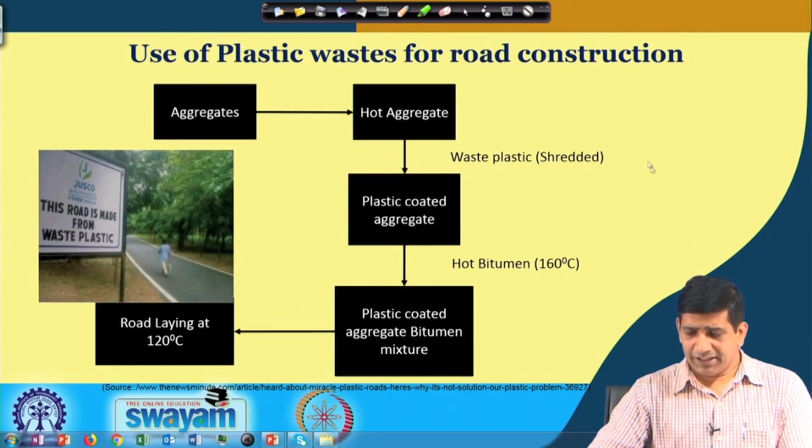So as you see, in Jamshedpur, in Tata Nagar, this road is made of waste plastic. So it's being used in many places in India and also abroad. The only thing you are doing different here is you are adding waste plastic in this step, and that helps in some of the properties which we will see as we make progress in this lecture. So that's where the waste plastic comes in, and then we will look at the whole process of how waste plastic use in roads is done.

So let's look at this, and then we'll discuss in more detail the use of waste plastic in road construction. And this video has an audio component. So again, I'll put myself on mute as long as this video is playing, so you listen to this video, and then we'll discuss some issues associated with that.

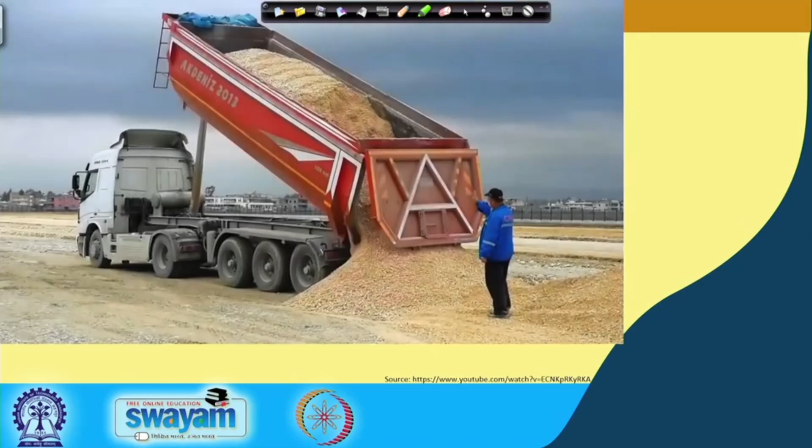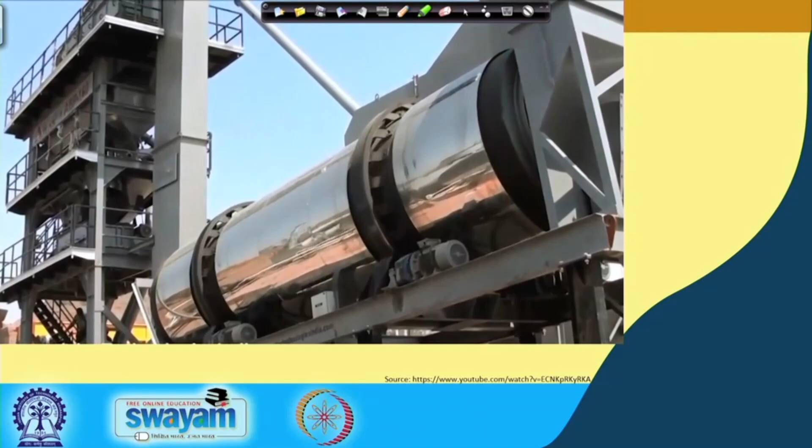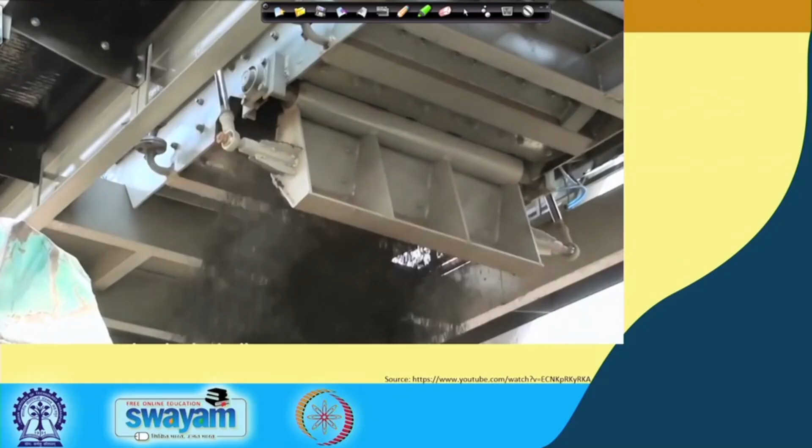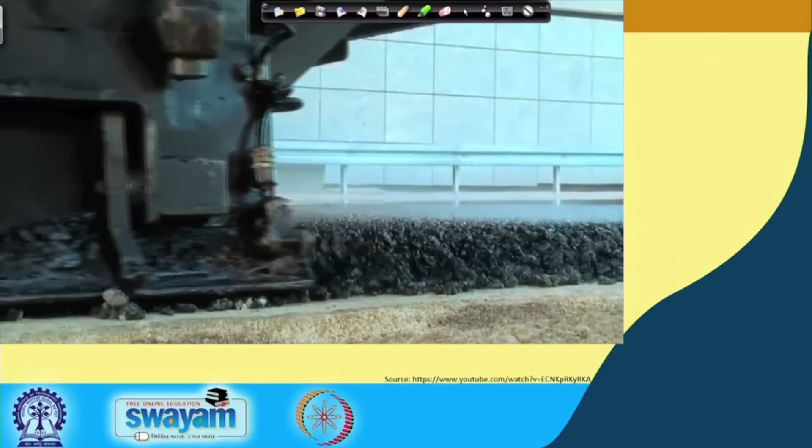Plastic roads, the laying procedure. The laying procedure for the plastic roads will be the same from the subgrade course to the base course, like any flexible pavement. The waste plastic is accumulated and is sent into the shredder machine. The shredded plastic will measure between 10 to 15 millimeters. Fixed proportions of shredded plastic are added to the aggregate on a conveyor belt in a hot mix plant. It is then sent to the mixer, where the shredded plastic melts and forms a layer on the aggregate. This process happens at temperatures between 170 to 180 degrees centigrade. The plastic coated aggregate is then subjected to bitumen. Plastic, being a good binding material, holds the bitumen together. The final BT mix is collected and loaded into the paver. In the final step, the plastic coated bituminous mix is laid according to the alignment and is compacted as per the standards. Plastic roads, a perfect solution. We are spending 4.5 trillion rupees on annual maintenance of roads and similar infrastructure. They are cost effective with nil maintenance.

As you saw, the whole process in which the plastic waste was laid was essentially similar to what we do for our road construction. But again we are adding this plastic, as explained in the previous slide. First the plastic is shredded and then it is mixed with the aggregate, and then we add bitumen to it.

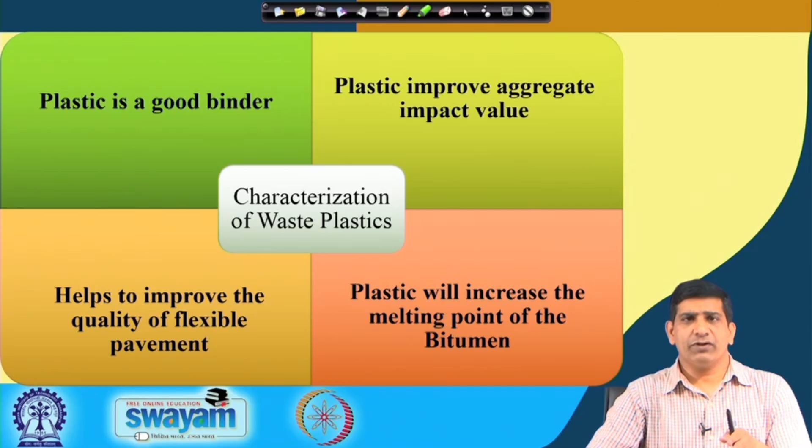So that's why it works, because plastic is a good binder. It helps in binding those aggregates together. It improves the aggregate impact value. It increases the melting point of bitumen, so it helps to improve the quality of flexible pavement. So these are some of the salient features of why plastic waste roads are considered better than traditional roads, and they have been found to be better as well, as documented so far. So these are some of the reasons why.

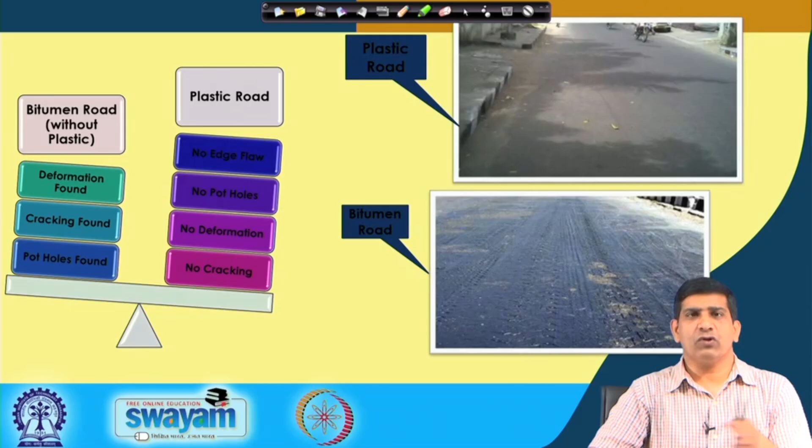And from a plastic waste management point of view, you also see that it's a plastic waste management solution as well, and at the same time it's a transportation solution, because this road is coming out to be better. But whenever we come up with any process, any product, anything, there will always be some issues and challenges, there are always some limitations. So, similarly here we have to clean the plastic,

because if you have too much dirt and other stuff, you have to clean it. You can have some toxic stuff present there. Toxic presence in commingled plastic waste would start leaching. So after cleaning, the wastewater that you have needs to be treated. So that's an issue. During the road laying process, there is presence of noxious HCl gas, because the plastic has some chlorinated product. When you have chlorinated product, you will have HCl gas being formed, and that becomes a problem.

And when you have pure plastic roads, it requires use of compatible plastics, because when you use mixed plastic, they may have phase separation, because there are different types of plastic. And if you have phase separation, then you will have a structural weakness, which can lead to premature failure. So you need to have similar types of plastics, compatible plastics that need to be used. So you have to make sure of that.

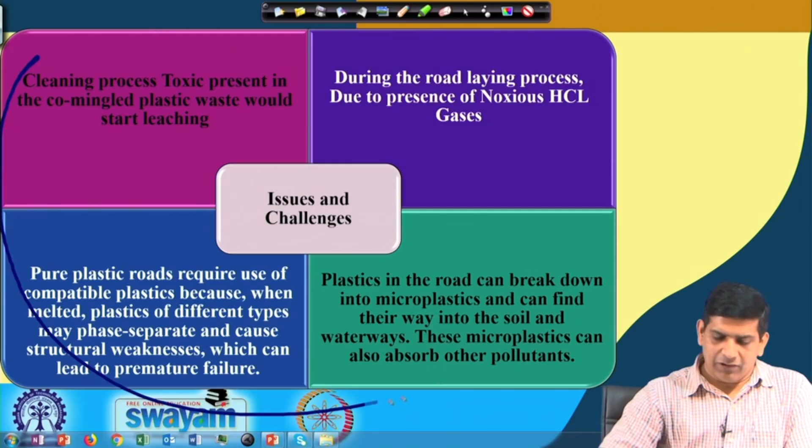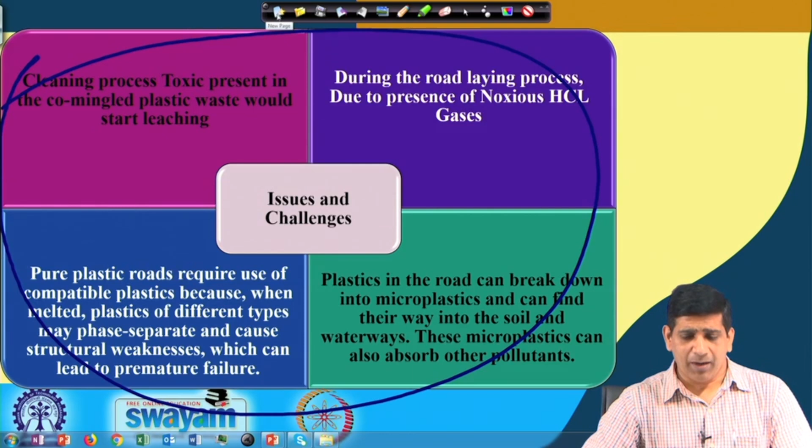So this use of plastic in road construction is a good thing to do, but at the same time these 4 issues that we are looking at here, and there could be some more, need to be looked into in detail, to see whether we are just solving a problem but creating some other problem. Those kinds of issues usually get captured when we do life cycle analysis calculations, because we will be looking at the cleaning of plastics, the microplastics coming out, the impact of microplastics in the environment and all that. They need to be looked into, as for any long term performance.

Advantages of using plastic in the road: stronger road as we talked about, good Marshall stability value, better resistance, no stripping, no potholes, increased binding, reduction in pores in aggregate, no effect of radiation like UV, strength of road increases, load withstanding property increases. If you have a 1 kilometer by 3.75 meter road, 1 ton of plastic, 10 lakh carry bags, is used, and 1 ton of bitumen is saved. So you are saving bitumen while using this plastic.

Cost of road construction will go down, maintenance is coming down, disposal of waste plastic is no longer a problem. And use of waste plastic on roads is a better place than burying it in a landfill. There are benefits, of course; that is why people are looking at it throughout the world, and we in India are also doing it.

Even the government Ministry of Surface Transport, if I am correct, I always get confused where the jurisdiction of one ministry ends and where the jurisdiction of another ministry starts. But I think it is the Ministry of Surface Transport which has come up with a guidance document which says that you need to use around 10% of plastic waste in road construction. So there are already some guidelines in place where the government wants people to use this plastic waste in road construction, because it has been found to be good.

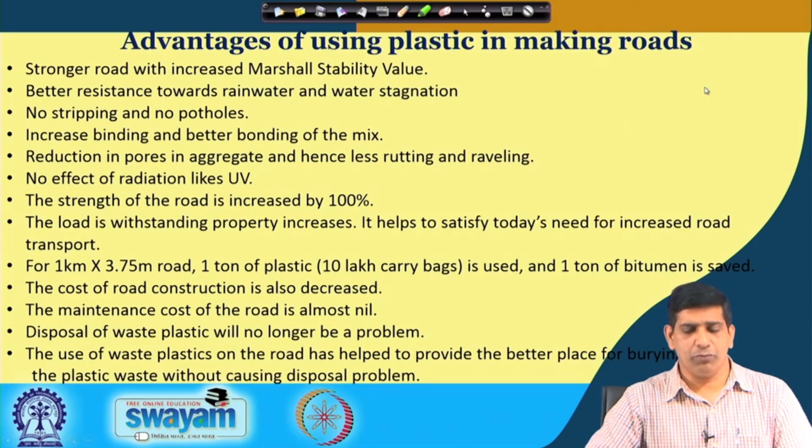But again, we have not looked at some of the issues that we talked about in terms of risk associated with microplastics, the cleaning of plastic, the wastewater that is coming out. So all those things should be looked into when we look at the big picture environment. The whole purpose of this course or any other environmental course is actually looking at the overall impact on human health and environment. We should not move one problem to another problem.

So if we are solving this waste plastic by road construction, but we clean those waste plastics and we have too much toxic wastewater, then this waste plastic problem became a toxic wastewater problem. Microplastics coming out, that is another problem. So we have to look at those issues in detail before we give a nice certificate to any process or any method. So, cleaning process disadvantage, as I said, toxics could be present during the road laying process.

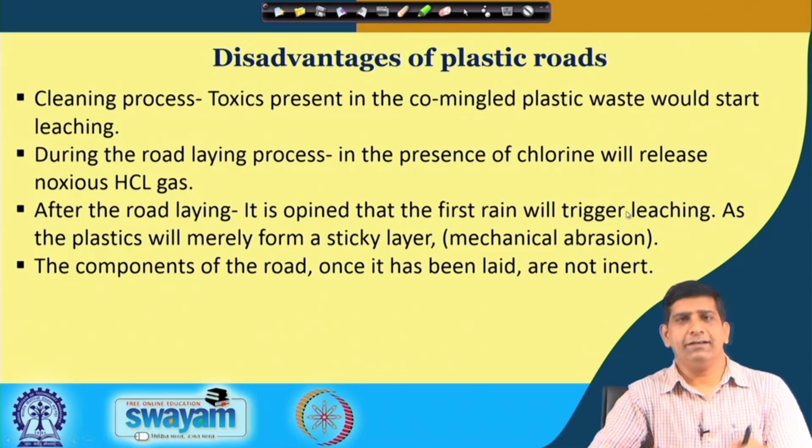The chlorine will release, first rain will trigger leaching, as the plastic will merely form a sticky layer, mechanical abrasion. So the components of the road when it has been laid are not inert. It does react. As I said, the government is making use of plastic waste in road construction. Road developers will now have to use plastic waste along with hot mix for bitumen roads within 50 km of the periphery of any city that has a population of over 5 lakhs. So for any city with over 5 lakhs, part of the plastic waste collected from that city has to be used in road construction. That has been mandated.

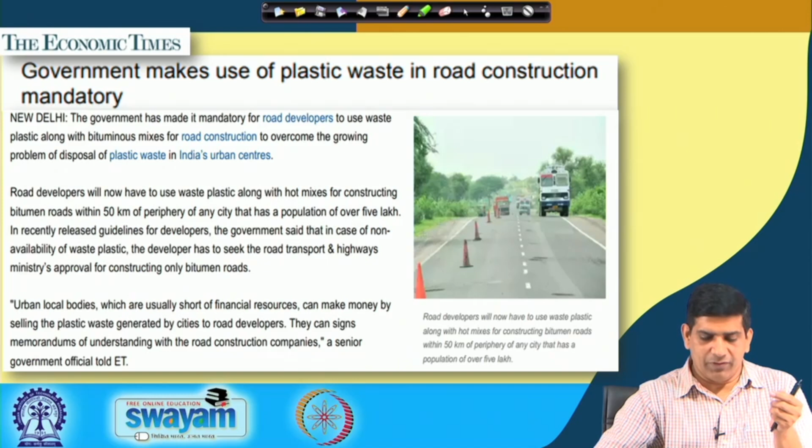So that is already there. The urban local bodies can actually make money from selling this plastic waste to the road developers. They can sign a memorandum of understanding, those kinds of things. Then, "Consider using plastic waste in road construction," Himachal Pradesh High Court tells the Public Works Department. This is again December of last year. So this is a very hot topic in India right now, plastic waste in roads, and it seems to be a good move, but at the same time we need to look at the other issues associated with that.

Many times we forget those, but we need to make sure what the risk is from using it, and how the risk compares with the benefit. That is always a good thing to do. So here the Himachal Pradesh Additional Chief Secretary filed an affidavit in the Himachal High Court. There are many waste plastic items like carry bags, plastic cups, plastic packaging, chips, biscuits, chocolates, which can be used for road construction, and are required to be cut to a size of 2.36 mm to 4.75 mm by using a shredding machine. So again you are using energy there.

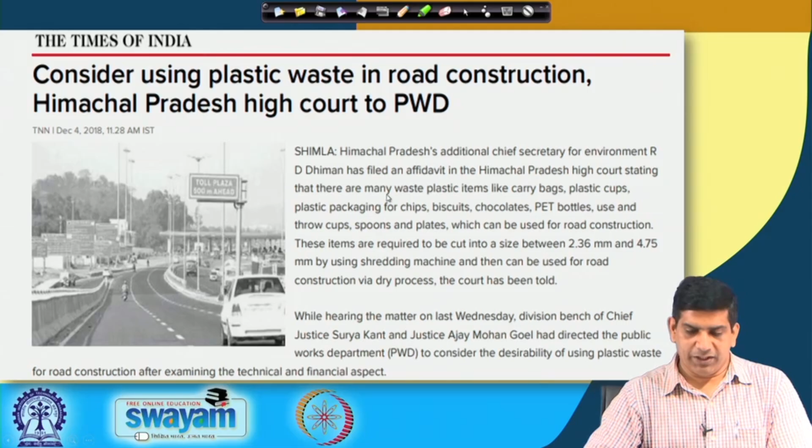Then it can be used for road construction via the dry process. So there again the High Court of Himachal Pradesh says that you should consider using waste plastic for road construction after examining the technical and financial aspects. So some study needs to be done to make sure that we are doing it correctly. Microplastics, we talked about the issues of microplastics coming out from different stuff.

We looked at microplastics earlier in the ocean. Here also, once you have this road constructed, you can have microplastics leaching off. Conventional wastewater treatment plants, with primary and secondary treatment processes, can remove microplastics from wastewater, but they were not really designed for removing emerging contaminants like microplastics, and the removal is actually by chance. Despite the efficient removal, final effluent can act as an entrance route for microplastics, given the large volume constantly discharged into the aquatic environment. Other pathways include stormwater runoff, windblown debris, and in situ degradation of large plastic items. So microplastics do come into the environment.

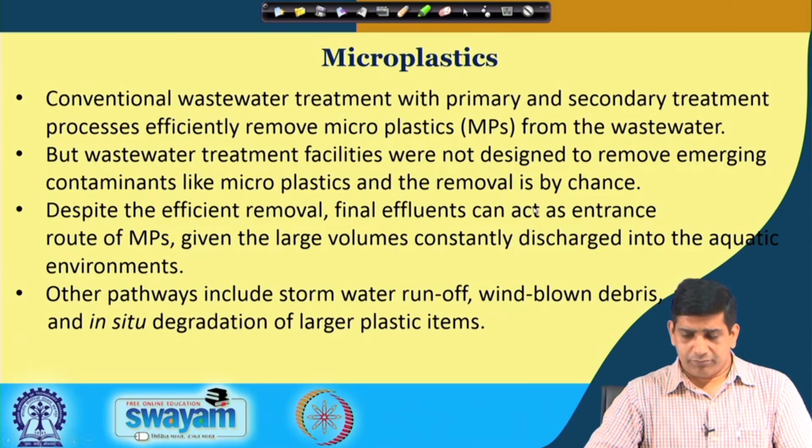So, microplastics do get removed in tertiary treatment, but many of the plants do not have tertiary treatment. They only have primary and secondary treatment. So, you do not remove that much of the microplastics coming out from that.

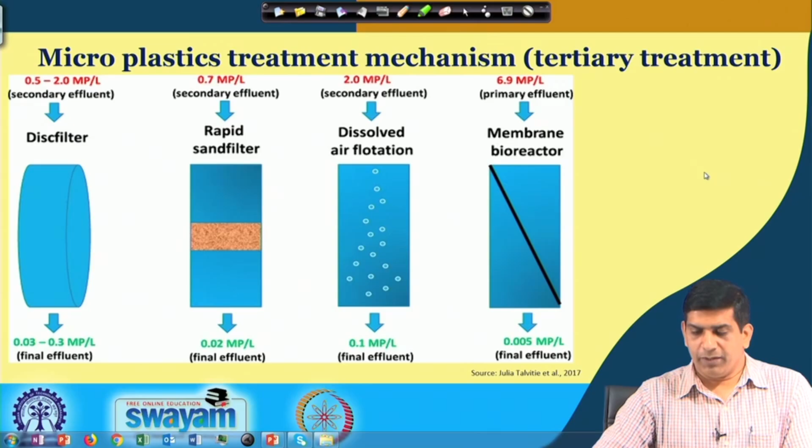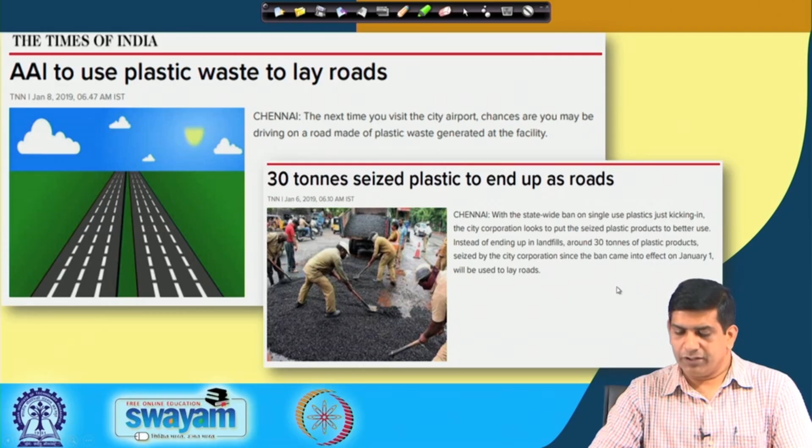Another initiative which has been done is that the Airport Authority of India wants to use plastic waste to lay roads. Next time you visit the city airport in Chennai, you might be driving on a road made of plastic waste. 30 tons of seized plastic to end up as road. So, with the ban on single use plastic, they found 30 tons of plastic was captured in the city corporation area in Chennai, and they are planning to use it in roads. So, that thing is there.

Waste plastic in Mumbai, sorry, in Bangalore also it is done. BBMP has used plastic on about 600 kilometers of road, including many thoroughfares and arterial roads. It is also used in plastic blends in at least 25% of the road laying works, including the present project to upgrade about 45 roads. The plastic model was successful on major roads in Bangalore, including Shankar Mutt Road, KH Road, MG Road, J C Nagar Road. So, these are just to give you an example that this is already being done in India. It's not new.

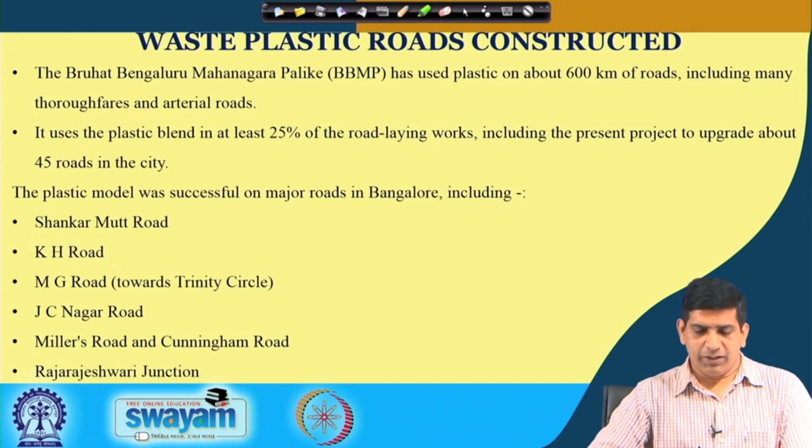It's already being done for the last several years, and this is potentially a good way of managing non-recyclable, non-energy recovery plastic. Rather than sending it to a landfill, we can make a road, use it for road construction, because it helps in making the road better. It also helps in conserving bitumen. So, you have to use less bitumen if you use waste plastic, and the issues associated with risk in terms of microplastics and toxic wastewater should be looked into to make sure we are doing everything okay.

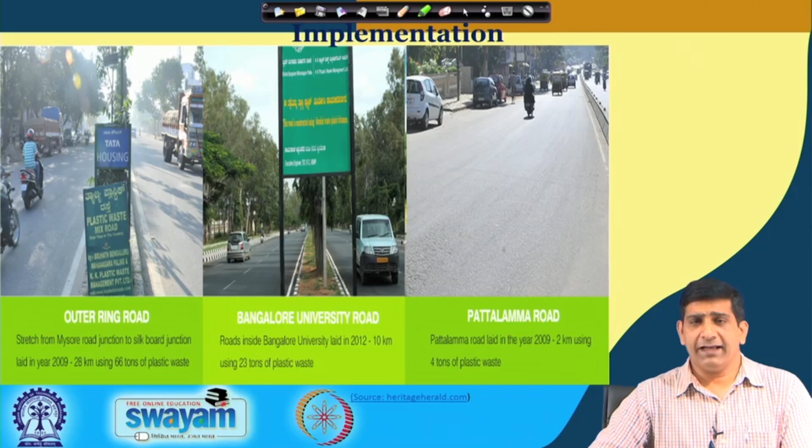Here are some examples of the outer ring road from Mysore Road Junction, Bangalore University Road, Pattalamma Road. So, as you can see, most of the roads look like an improved version of the traditional road. So, plastic roads seem to do better, and it has been reported to do better. There are reports already out there; it's not just a claim. After using it for a few years, people are finding it to be better than the traditional road. So, you see some examples.

Another example, this is the plastic waste road. Then on the right hand side, again the plastic waste road. This picture is from Jusco, which is in Jamshedpur.

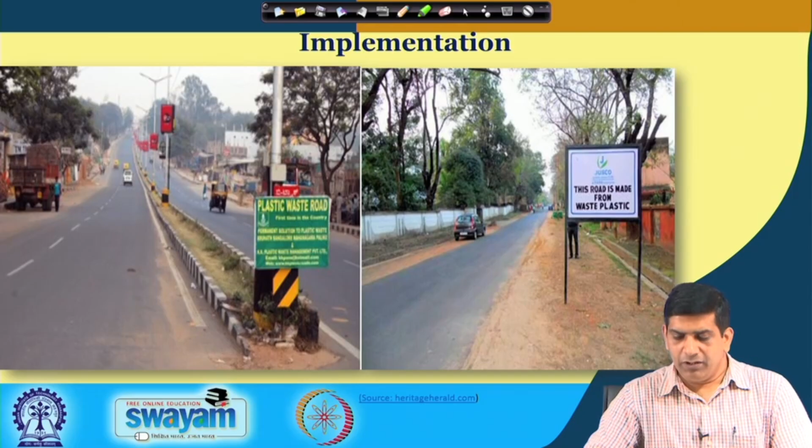So, this particular week, we have looked into the different aspects associated with plastic waste management. Generation of waste plastic is increasing day by day. We are having more and more plastic being produced. Right now, based on government data, we have around 12% plastic waste in the municipal solid waste stream, and that number will potentially go up as the country progresses, more packaging, more stuff. Of course, we are trying to reduce single use plastic, but we have other plastic items which we will keep on using.

So, we will have more and more plastics coming into the waste stream, and when we look at plastics, there are different types of polymers, polythene, polypropylene, polystyrene, and they have good adhesion property in the molten state. And when you use waste plastic for road, it helps in increasing the melting point. Hence the use of waste plastic is one of the best methods for easy disposal of waste plastic.

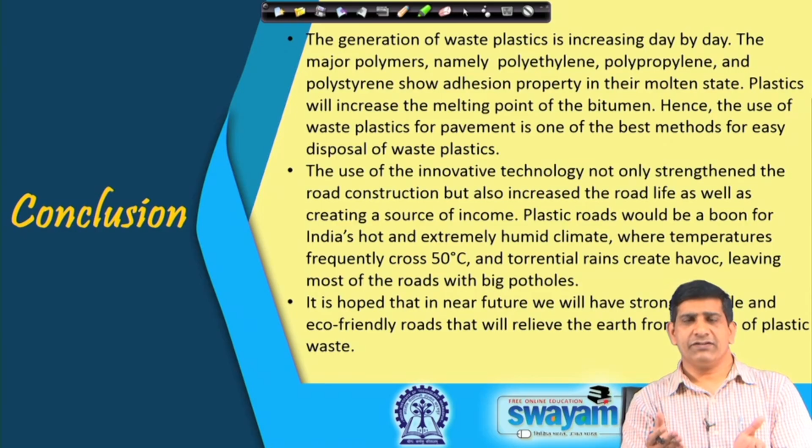So, again I hope this week's material was useful to you, and we looked at different aspects of plastic waste management, and we tried to cover whatever we could in a week's time. This is just the beginning, as I keep on saying every week. If you are really interested in this topic, this course would be just the beginning step, and you need to read more about it.